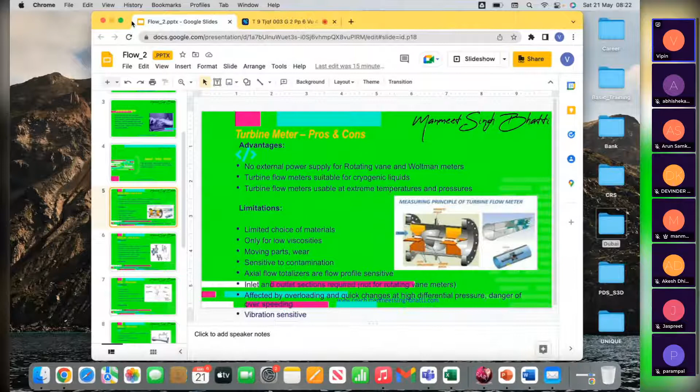Welcome to this flow training session, part 2. I have directly gone to the slide because the previous general slides were the same, which we shared in the last meeting, so I will not be repeating that. There are so many flow instruments; some of them we covered in the last presentation, and the balance we will be covering in this presentation.

Now, before we start, the question most engineers ask is: there are so many flow instruments, so how do we decide which flow instrument we should opt for a particular service? My answer has always been there are 3 important things we need to look into. First, what is the principle of operation of that instrument? Then what are the advantages associated with it, and what are the disadvantages? Unless an instrumentation engineer is familiar with these things as a minimum, he cannot select and design the right flow instrument for his or her application.

So in today's presentation, I am going to discuss some of the flow instruments and talk about their pros and cons, advantages and limitations, so that you have a fair amount of understanding about where to use which instrument. The first in this line is turbine meters. Turbine meters historically have been quite old. They have been used for a very long time.

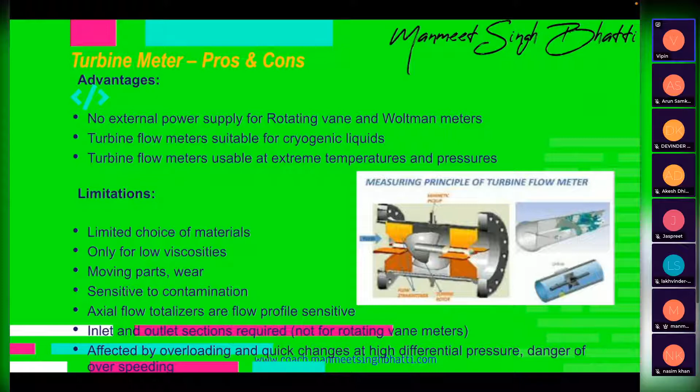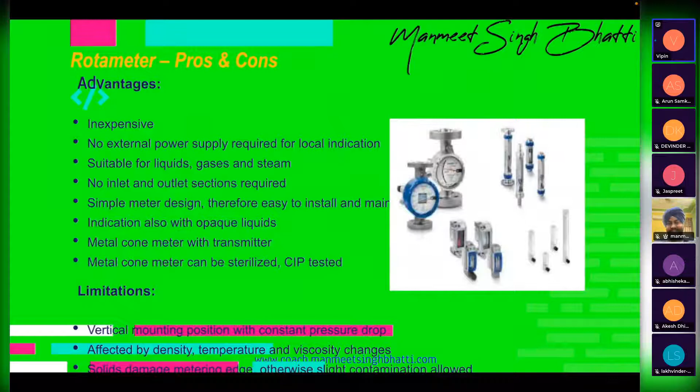Noted, sir. Because now I'm moving on. Sorry, having lot of points in the slide itself, but very few questions coming up. Yeah, in fact, I am expecting more questions. The more they ask, the better I feel actually. So at least. Okay, not a problem, now. Sir, you can continue. Yeah.

Yeah, okay, so moving on to now another and one of the very important and quite widely used in the world, the vortex type of flow meter. Now vortex, there is some very interesting story behind it. I will just take a minute on this. So you must have seen that in a pond or a lake or a river, if there is a stone or a rock and the water is hitting on it, the water gets bifurcated on both sides of the rock or the stone, and it produces a swirling motion, a round motion, a curly motion around it. Okay, now that is the basic underlying principle of a vortex meter.

So what happens is a shedder bar, if you can see in the picture, a shedder bar is kept. It is called a bluff body also. Sometimes you might hear the word bluff body. The shedder bar, it is one and the same thing. It is a piece of metal with a specific shape which protrudes, which goes inside the pipeline. Okay.

So when the fluid hits the shedder bar or your bluff body, it moves on both sides of the body in a swirl motion, a curly motion. So the frequency of these curly motions is picked up. So higher the frequency of these curly motions, the higher the velocity, higher the flow rate. Okay. This is simple in terms of the principle.

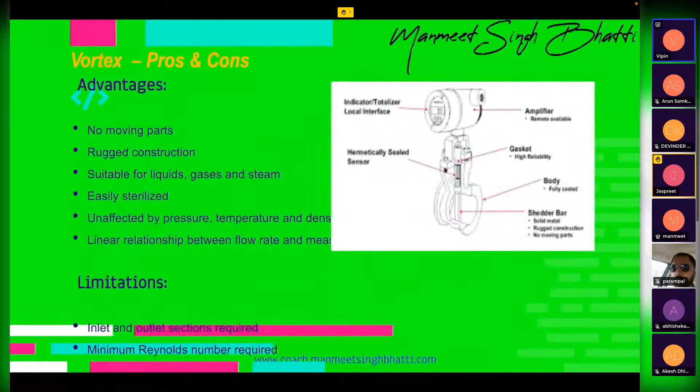Yeah, Jaspreet has got a question. I think he should be asking. Yeah. So what is the maximum size we can go for with vortex, and what are the fluid properties required to get the vortex flow meter installed instead of an electromagnetic flow meter?

See, I will answer the question piecemeal. Okay. Now, vortex meters, theoretically, you can go for a very high size also, but practically, because of the shedder bar and the bluff body, if you go for a very high size, let's say about 12 inch, 14 inch, 16 inch and above, then there will be a vibration in this shedder bar. Yes, because the length will be increased. Yeah, so it will start resonating. And God forbid, if it resonates at the resonant frequency, then fatigue will creep in and it might damage the shedder bar. So that is the thing which limits the size of the vortex meter.

But you can definitely get 6 inch, 8 inch, up to 10 inch also. Some vendors limit up to 8 inch, some vendors limit up to 10 inch. It is vendor specific also. So that is question number one, to answer your question on that.

Question number two, for an electromagnetic flow meter, the most important criteria is you need to have a minimum conductivity in microsiemens for the liquid which you are going to measure the flow rate, because the principle is based on that conductivity. Correct. Whereas in the vortex, there is no such thing. As you can see, pressure variation doesn't have any impact, temperature variation doesn't have any effect, density variation doesn't have any effect. And unlike other instruments, because a capacitance type instrument is based on the dielectric constant, and magnetic type is based on the conductivity principle, this is not dependent on any parameter,

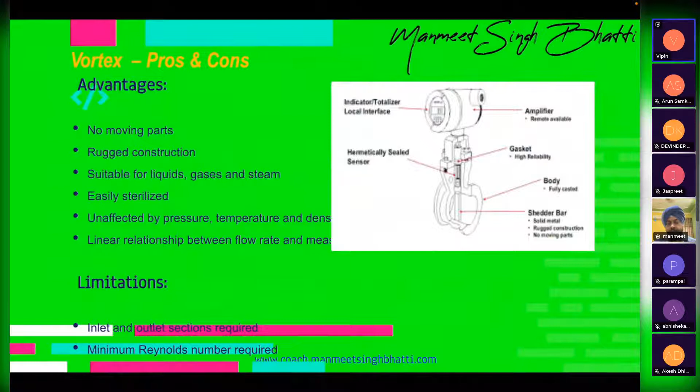There is one more question from Nikhil in the chat box, on accuracy and rangeability. He wants to know about the accuracy and rangeability for the vortex flow meter. Rangeability by default, you can easily assume 10:1 as a minimum. Some vendors might give higher rangeability also. That's number one. Number two, in terms of accuracy, it is as good as any other pressure transmitter, DP type, or temperature transmitter nowadays because of the smart type.

You get very good accuracy, like 0.5 or even less than that, basically. So in terms of accuracy, the instruments are quite accurate, as good as any other pressure transmitters, differential pressure transmitters or temperature transmitters, as a matter of fact. Rangeability can go anywhere from about 10:1 to 20:1, 30:1. It depends on vendor and size. There are some other factors also to look into actually.

Yeah, Akesh wants to speak, I think. Hello, good morning, sir. Good morning. So you said the shedder bar might break if we go for a high size. My first question is, can we replace the shedder bar in case of any breakdown? My second question is, can we install it in a vertical line like we did with the rotameter? And my third question will be regarding its repeatability. Thank you, sir. So your first question is whether the shedder bar can be replaced?

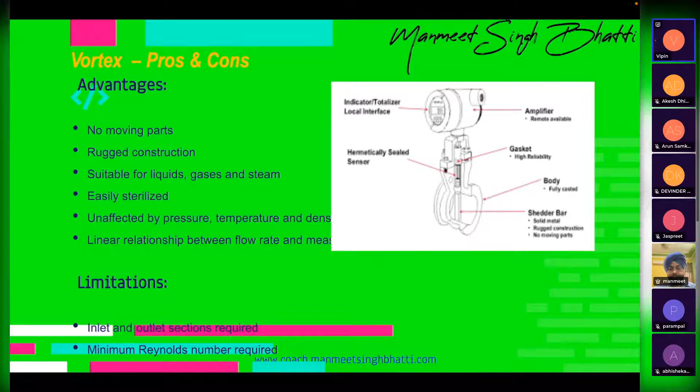When you are talking about analyzers, yes, but when you talk of transmitters, repeatability is generally not looked into. I will not say not looked into, but generally it is not that important a parameter. It is basically the accuracy, which has a combined effect of linearity, hysteresis. Repeatability generally becomes important, as I told you, in the switches, which are basically purely a mechanical item.

Whether the switch will actuate every time when it goes to that level. Or in analyzers, repeatability is very essential. In the transmitters, generally that is not a point of concern actually. But yes, you can look in the catalog and see the repeatability. But as I told you, vendors nowadays will say accuracy.

When you talk of a transmitter, you only talk of one word which is most important, accuracy, which basically is a combo of linearity of the transmitter, hysteresis, and other effects, all combined together. Any questions?

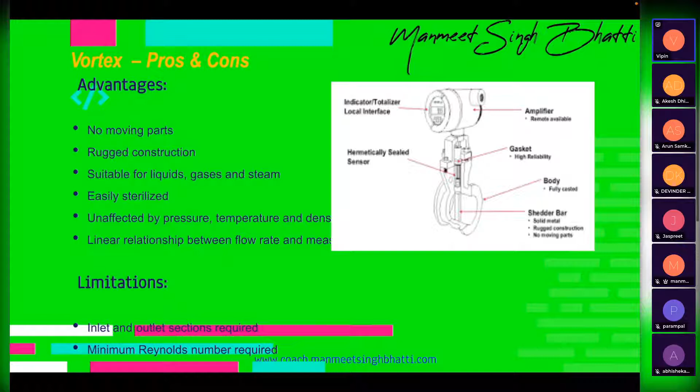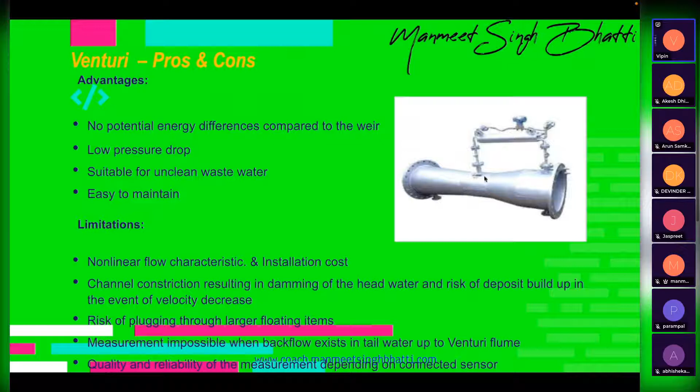Okay, moving on to the next, which has the same principle as an orifice plate because it is a differential pressure measuring principle, is a venturi. Now, if you see here, a venturi has three parts: the inlet side, which is straight and then converging, then a flat portion in the middle, which is called a throat, and then the diverging portion.

So now what are the advantages? The advantage here compared to an orifice plate is that a venturi has a low pressure drop. Generally in an orifice plate, the pressure drop is very high. Now again, here the condition is that the fluid or liquid need not be a very clean one.

One more advantage is it is very easy to maintain, because these are just pipe sections put together: convergent, throat, and divergent. So it is a very simple mechanical equipment, you can say, with no moving parts and just the takeoff points at the two ends.

Now regarding the size of the venturi, if I remember correctly, generally 4-inch is on the lower side, and you can go up to 24-inch and 28-inch venturis also. So that is one advantage, you can have higher size venturis if the application demands. The limitation, as I told you already, is the non-linear flow characteristic. It is basically a square root relation, like an orifice plate.

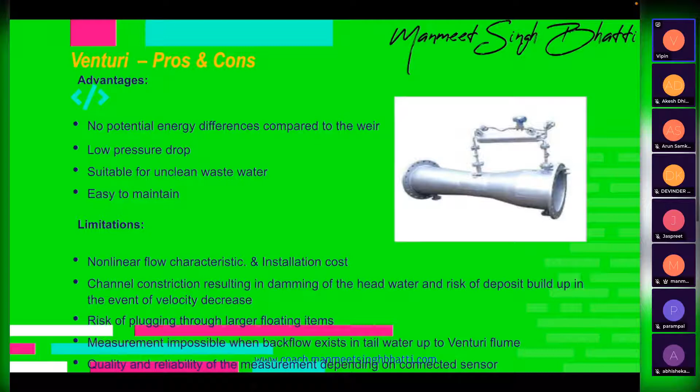Like any other flow instrument, it does require a straight length, but it is a very short straight length required upstream and downstream. You don't require a higher straight length like 10D or 20D. Okay. Again, it is suitable for measuring liquid, gas, and steam applications.

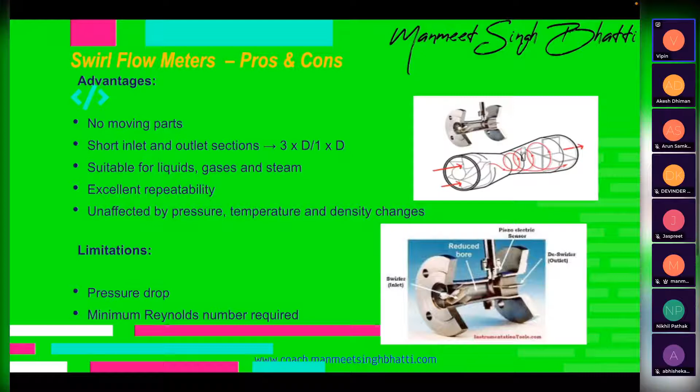Now, what advantages do these oval gears offer? Accuracy is very high, because with each revolution of the oval gear, a specific volume is transferred from the inlet to the outlet section. Suitable for measuring media with high viscosity, so you can also measure fluids which are highly viscous, meaning thick. Another beauty is these are bidirectional flow meters. The inlet can become outlet, so you can measure the flow in either direction.

No profile effect, which means you don't require upstream and downstream straight length, which you generally require in any volumetric flow measurement instrument. Then no external power supply, because these are purely mechanically operated devices with two oval gears mechanically linked, which move when the fluid comes in. By virtue of the fluid velocity impinging on the oval gears, they start rotating.

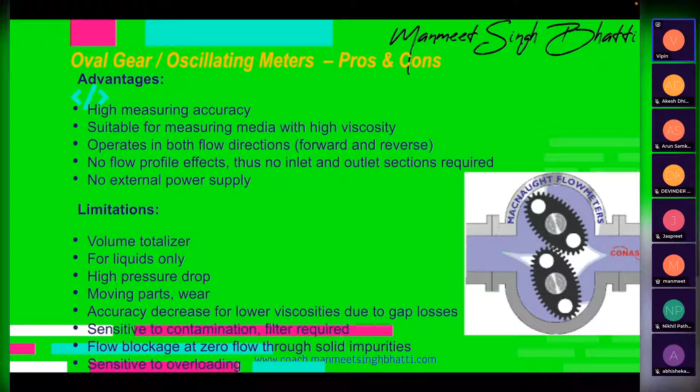Now, if you look at the advantages, excellent measuring accuracy for gas measurement. So if there is any gas measurement, these are used. These are preferred compared to the other meters we just talked about, the previous one, for example, which are not suitable for gas. So you can use this for gas applications. Again, these don't require any inlet and outlet, so you don't require any straight length, either upstream or downstream.

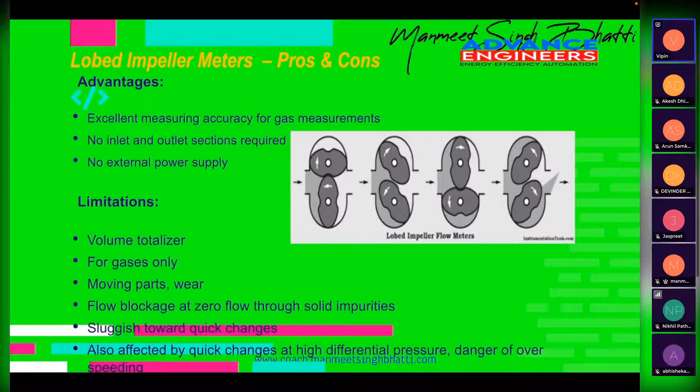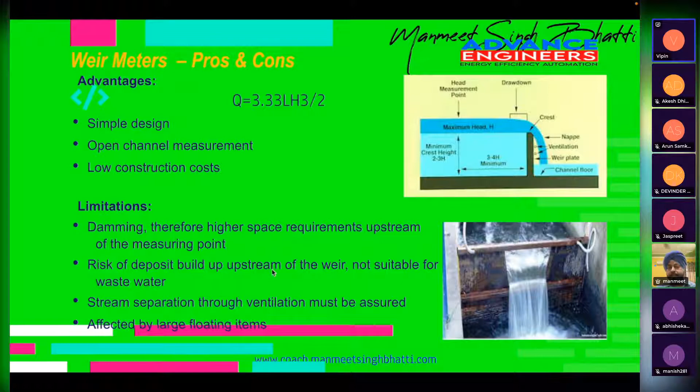So as soon as the level goes up for these canals, they note that this much water is going through. Even today, a lot of areas still don't have any kind of online measurement. So they do the measurement primarily based on mechanical measurements only. That is the way it has been done.

And I hope you had a good understanding of these flow meters. Any specific questions you want to ask? Any query or any questions we have missed answering?